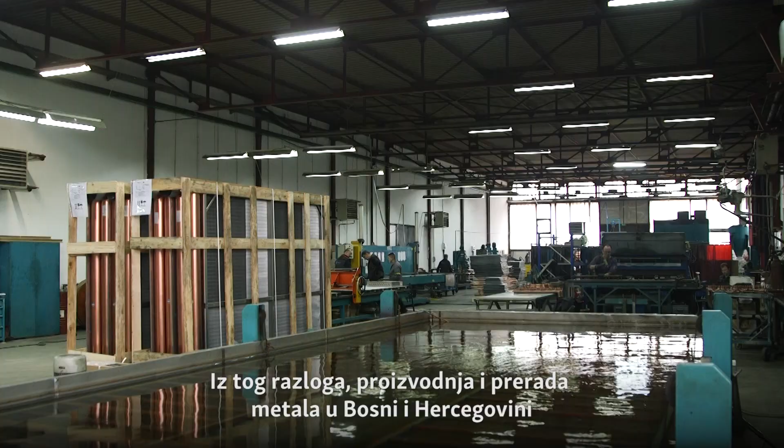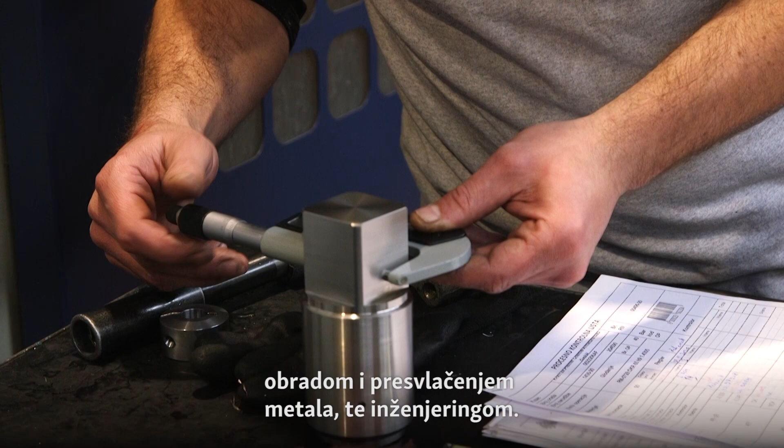Bosnia and Herzegovina is rich in iron ore, bauxite, lead, zinc and copper. For this reason, the production and processing of metals has a long tradition with deep-rooted history, especially in craftwork. Today, Bosnian companies produce base metals and final metal products through forging, metal processing, coating and engineering. Consistent growth in the number of companies and employees, a significant increase in sales and export revenues, and ultimately the profits, make the metal industry one of the most successful industries in this country.

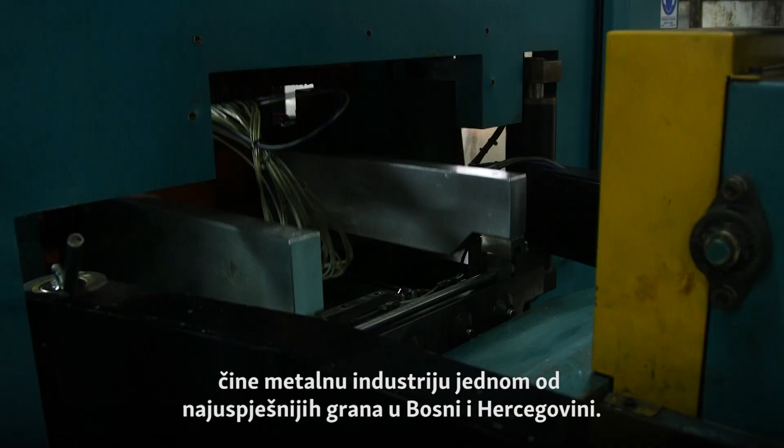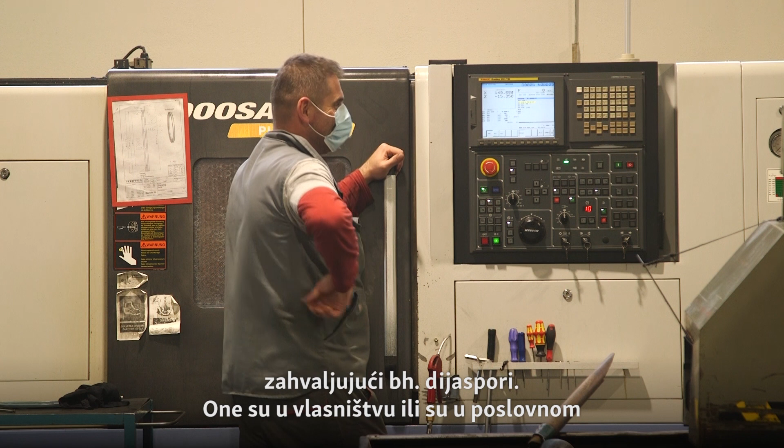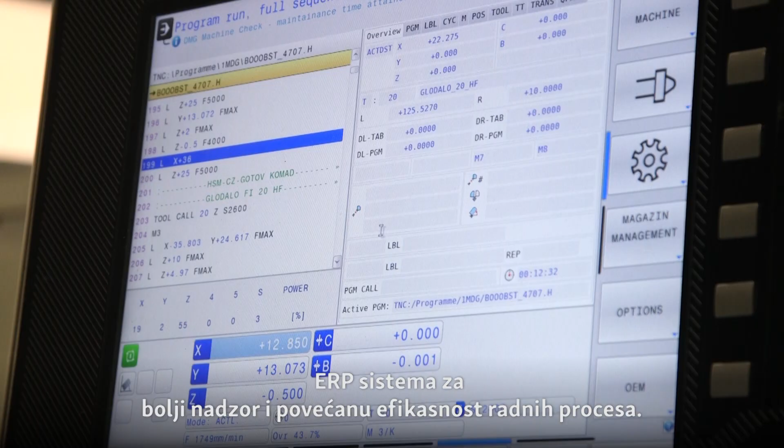In the last 4 years, USAID Diaspora Invest has supported companies launched by Bosnian diaspora. They are owned by, or in a business relationship with, diaspora entrepreneurs. These connections are made for better access to the international market, or for knowledge transfer from abroad to the homeland. A few years ago, the Obarshanin family's venture MDG International was one of our first success stories showcasing Bosnian investment potential. The USAID Diaspora Invest project supported them by introducing an ERP system for better monitoring and increased efficiency of work processes.

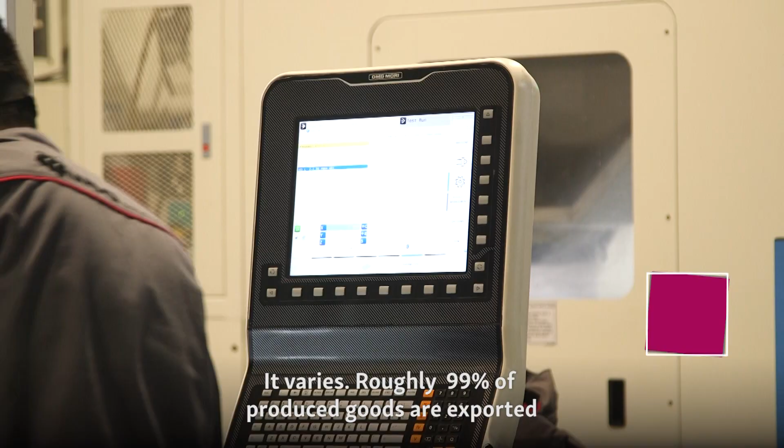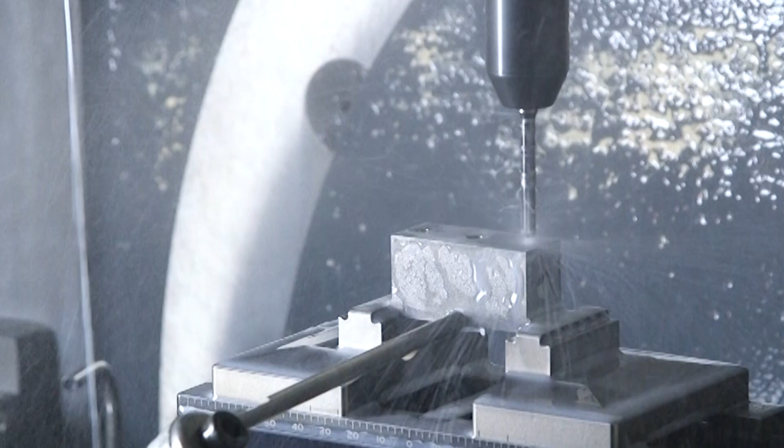Export-oriented MDG International supplies metal products for the transport industry, logistics, medical equipment, machinery, and to a lesser extent the automotive industry.

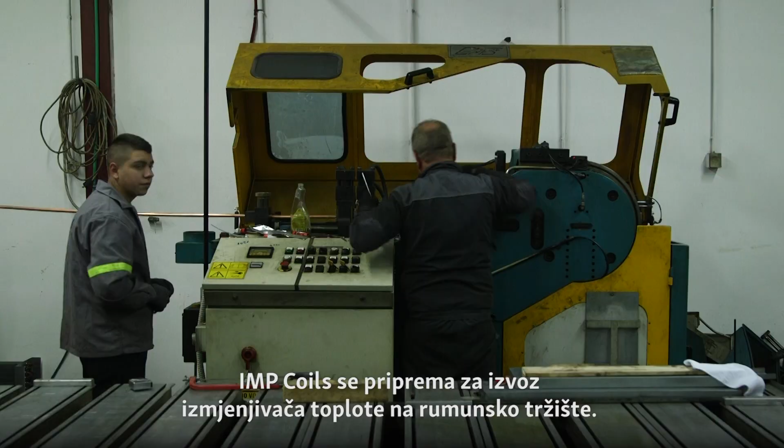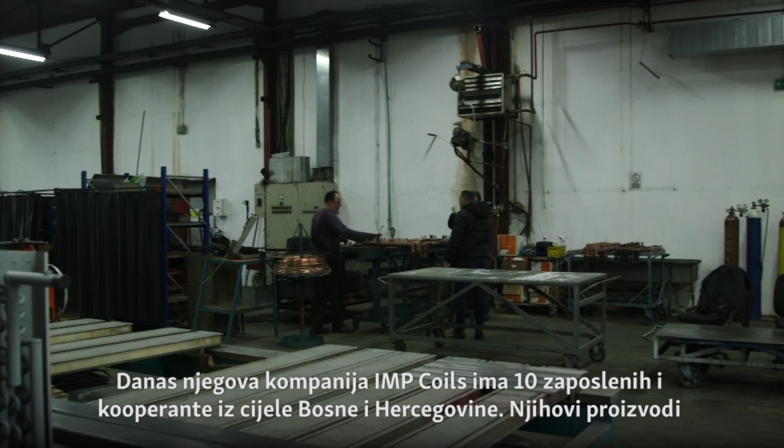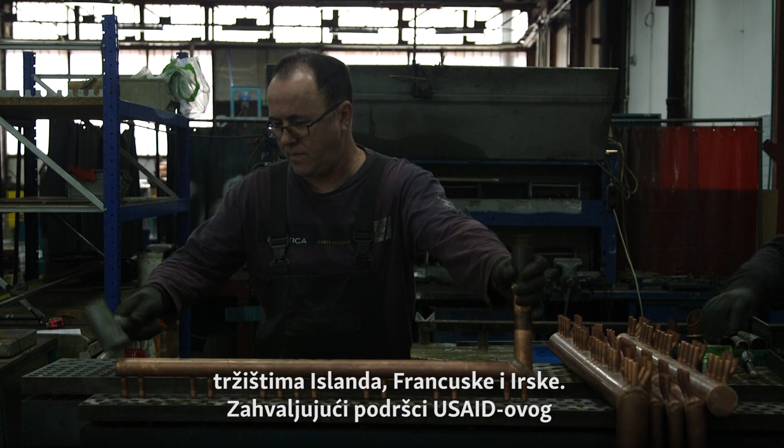IMP Coils is preparing to export heat exchangers to the Romanian market. The head of the company, mechanical engineer Asud Cekic, spent his previous working life in the production of air conditioning chambers and heat exchangers. After many years of work at the pre-war giant Uniklima, Cekic was given an opportunity to buy heat exchanger technology. Today, his company IMP Coils has 10 employees and subcontractors from all over Bosnia and Herzegovina. Their products have even reached Mexico and Qatar. Occasionally, they also supply the meat industry, agriculture, and dryers. New opportunities are opening up for them in the markets of Iceland, France, and Ireland. Thanks to the support of the USAID Diaspora Invest project, they purchased a software solution that facilitates their communication with clients.

We are now at Selpak, the business zone in the city of Prijedor. This is Sabahuddin Islamoski, who is behind the idea of launching a new business initiative in the metal sector. It all started from a craft shop which produced stainless steel elements.

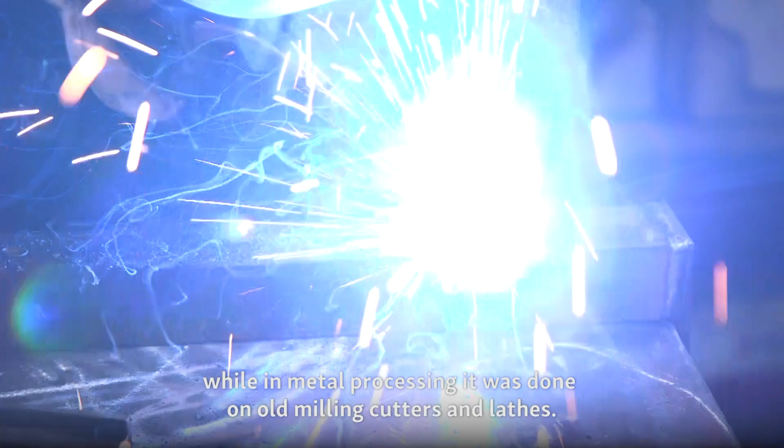After an increase in demand, the story of the company CNC Power began.

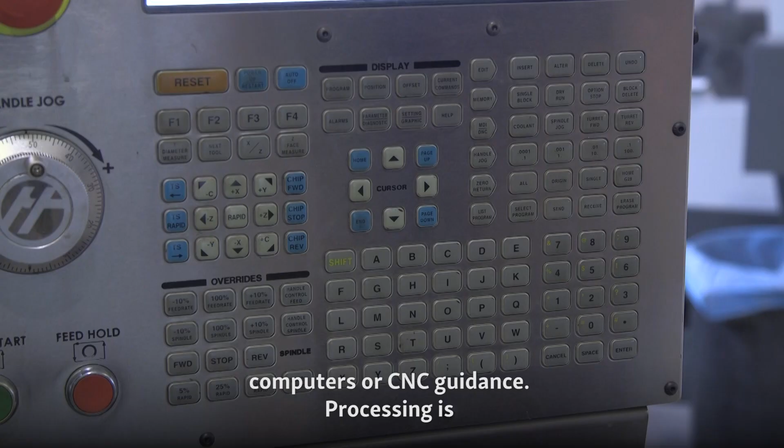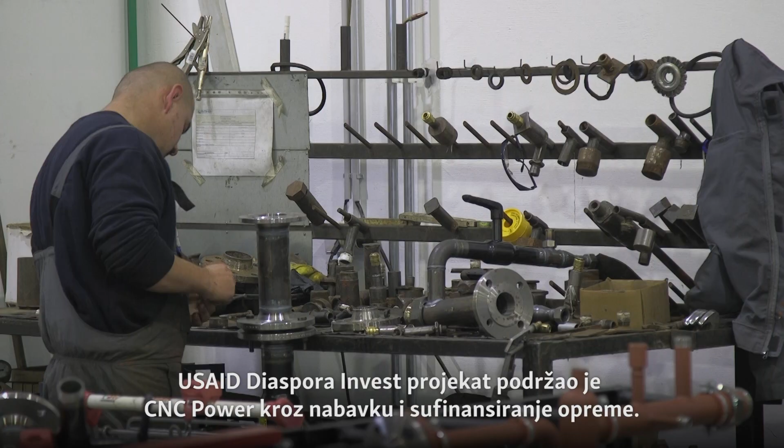The USAID Diaspora Invest project supported CNC Power through the procurement and co-financing of equipment. The company currently has 4 employees, and over the next 2 years, they plan to invest in new machines and hire 20 new employees. Where there is tradition, there is also a future.

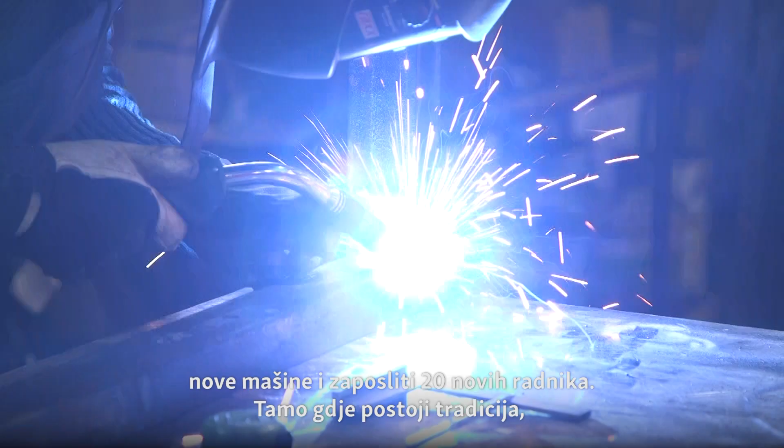But what else is necessary for greater success?

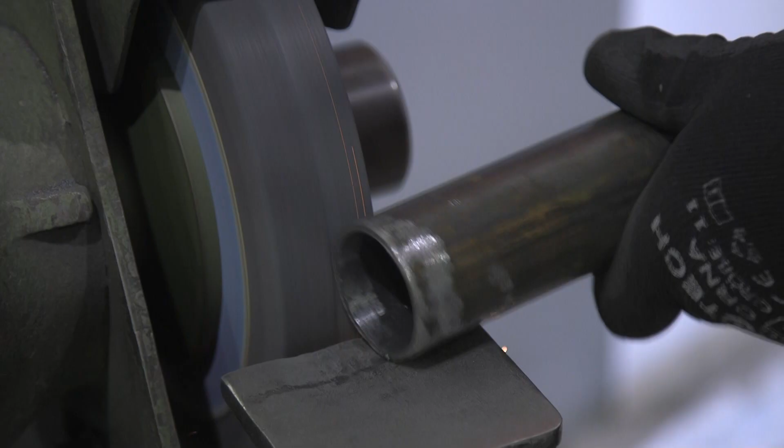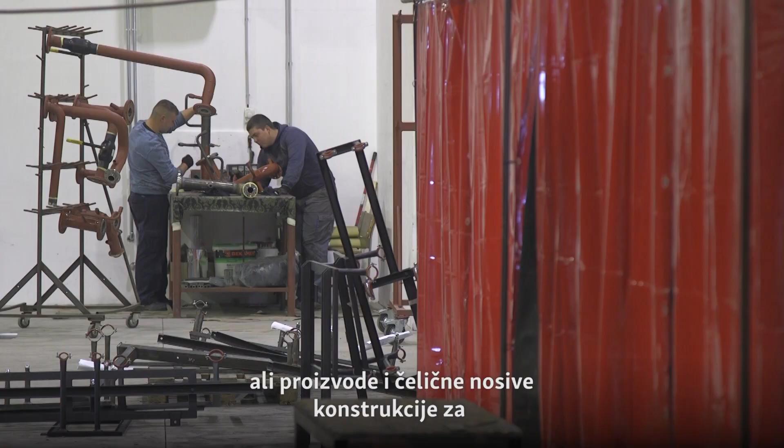Across from CNC Power, in the industrial zone in Prijedor, is where Edna Metalworking is located. The main product of this company is pump substations for central heating, but they also produce steel load-bearing structures for robotic painting, mainly in the automotive industry.

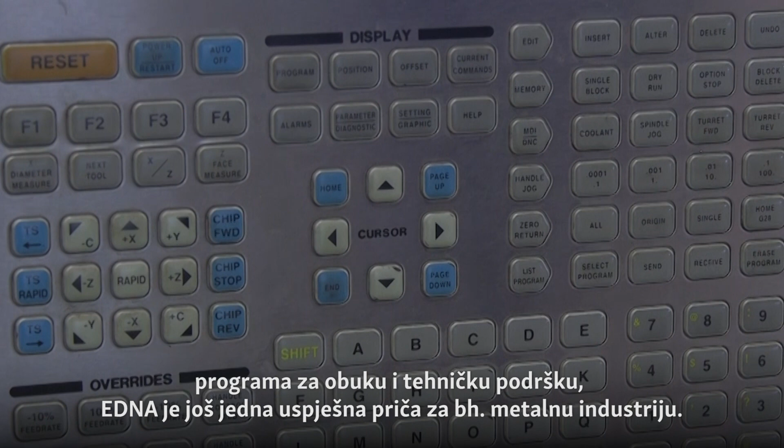Launched also thanks to a diaspora investment and a beneficiary of the USAID Diaspora Invest Training and Technical Support Program, Edna is another success story for the Bosnian metal industry.

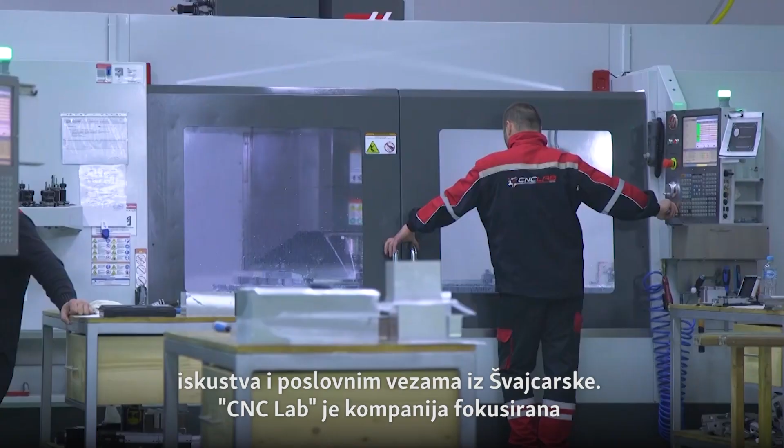CNC Lab is a company focused on metal machining, primarily for individual production, but also for small series and serial production on CNC machines.

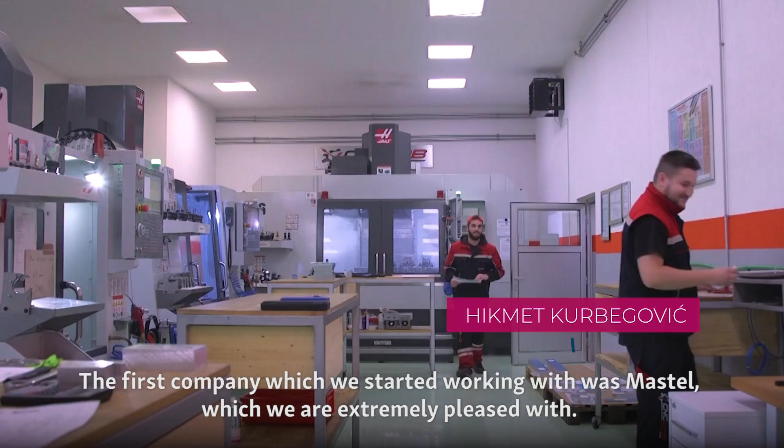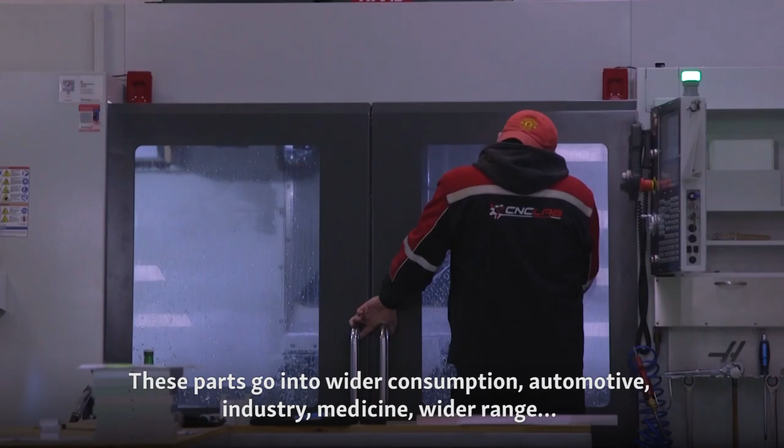But CNC Lab is not alone in Sanski Most. Several metal companies, in different stages of development, are growing and building their success stories in this city. One of them is the company CNC Tabakovic, which also produces metal products on CNC machines.

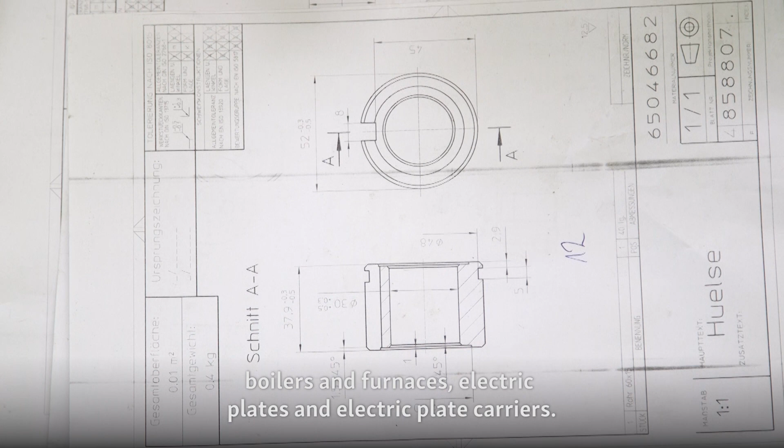Thanks to business savvy Bosnian diaspora in Germany, Austria and EU countries, most of the company's products end up in the Austrian and German markets.

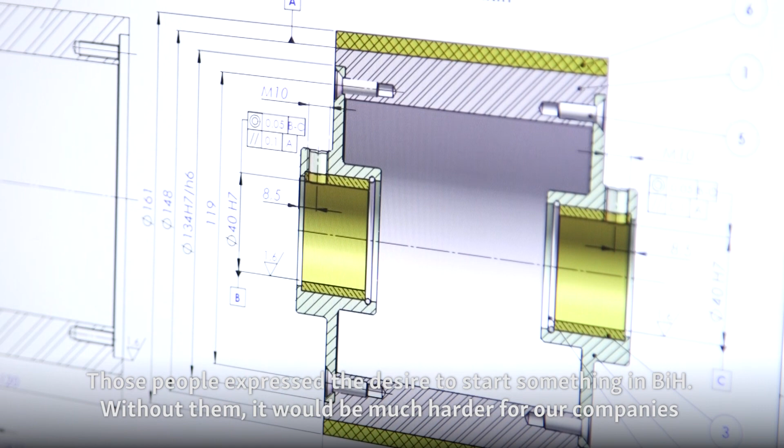They started production in 2019, when they had only one employee. And today they employ 4 people.

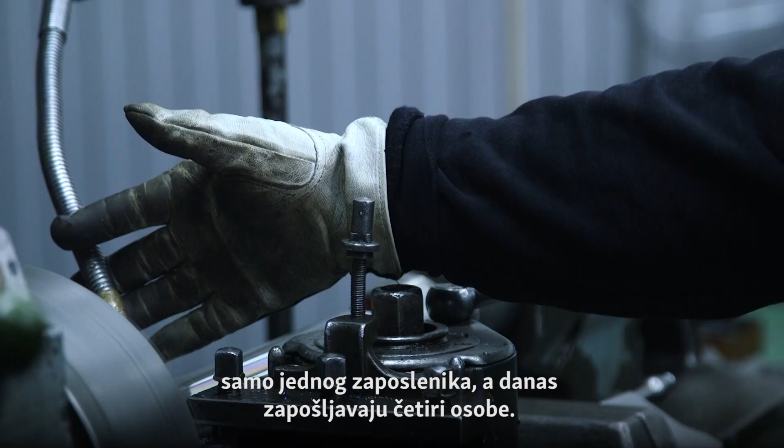Their staff took part in the sales and communication training provided by the Diaspora Invest project at the end of 2020.

As we move towards the border and the market of the European Union, there are more and more small companies that find their chance to connect with Bosnian diaspora in hopes of developing business in the metal sector.

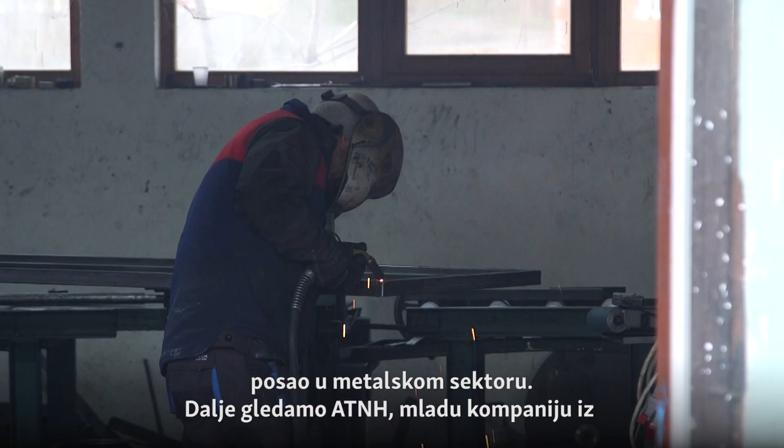Next, we look at ATNH, a young company from Bosanska Krupa founded in 2017. Initially, it was limited to hiring labor and making smaller products in just 20 square meters.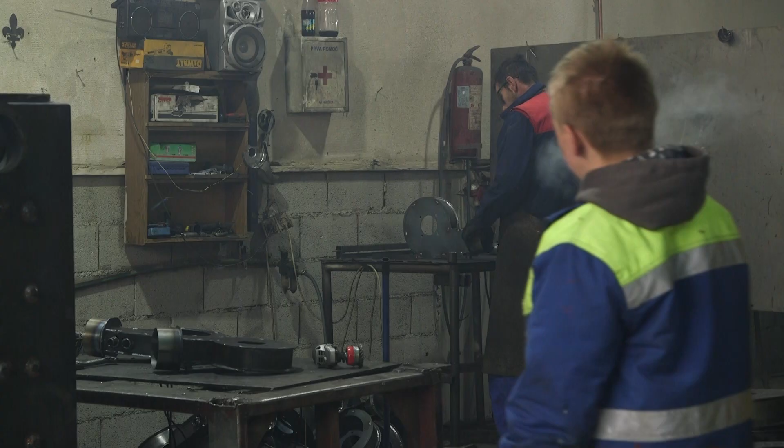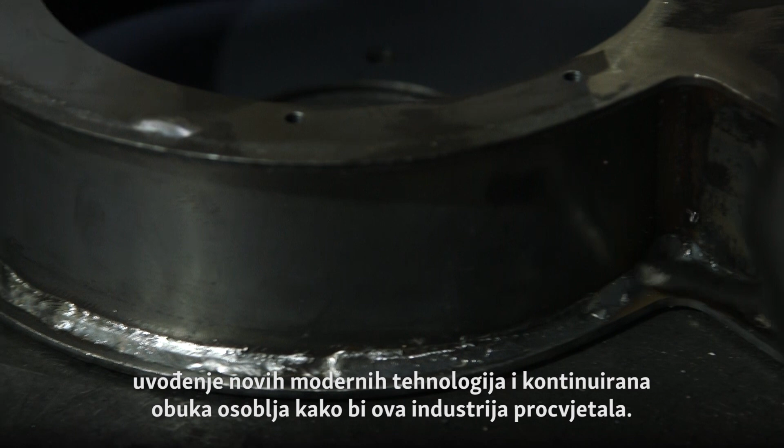Bosnia and Herzegovina's metal industry is growing day by day. These people show that there are great opportunities for this industry's development. Investments in small and medium enterprises, the introduction of new modern technologies, and continuous staff training are needed for this industry to flourish.

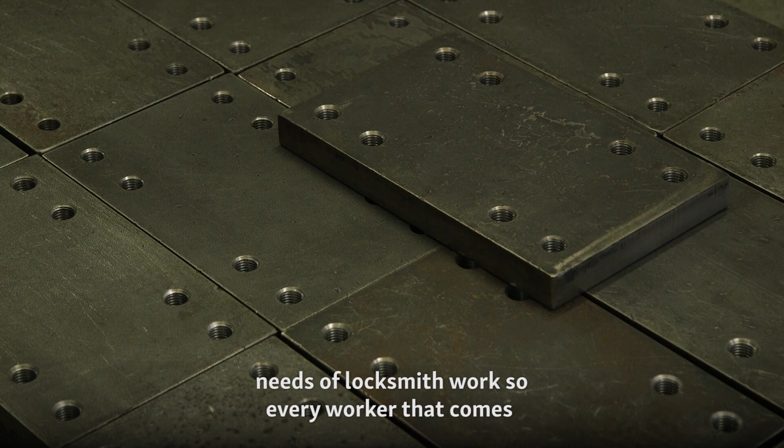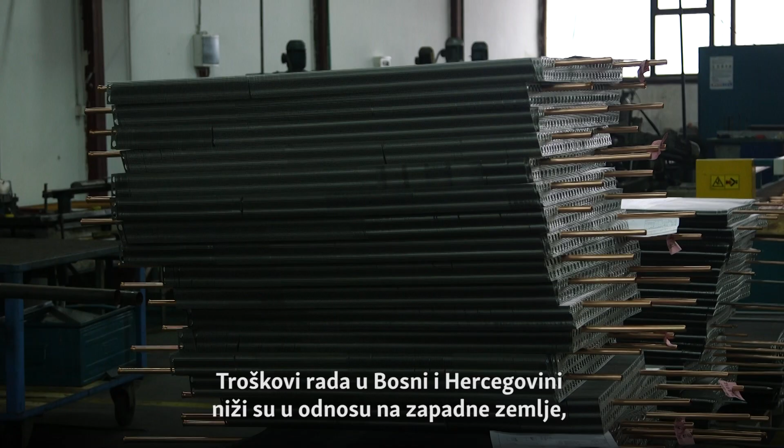Labor costs in Bosnia and Herzegovina are lower compared to those of Western countries. But this is not the only reason why Bosnian companies are chosen.

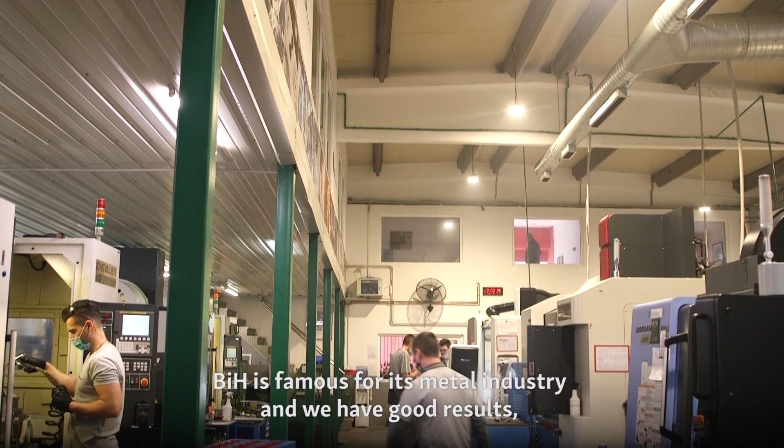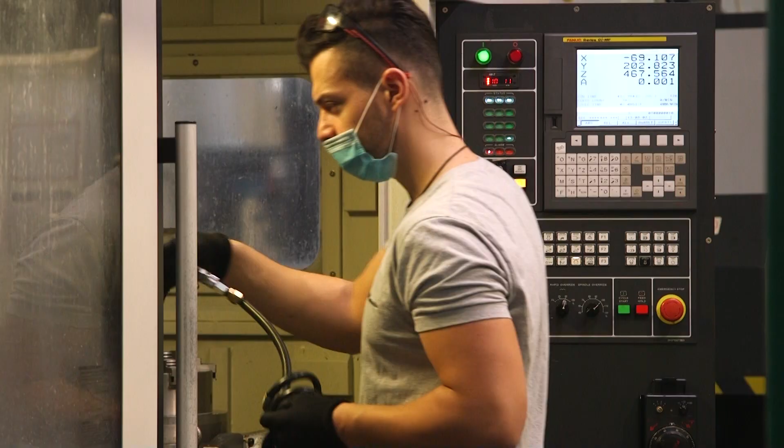Investors and clients from all over the world recognize the opportunities that come with the transfer of production to Bosnia and Herzegovina.

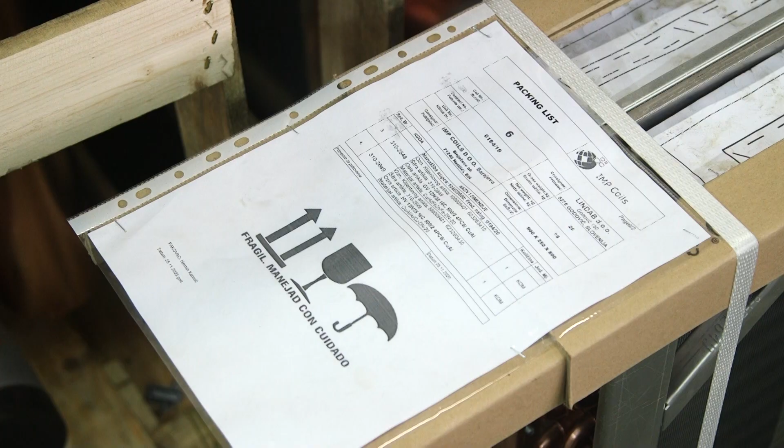With their successful work abroad, Bosnians and Herzegovinians have become the best ambassadors of their country's economy and key in attracting foreign investment to our country.

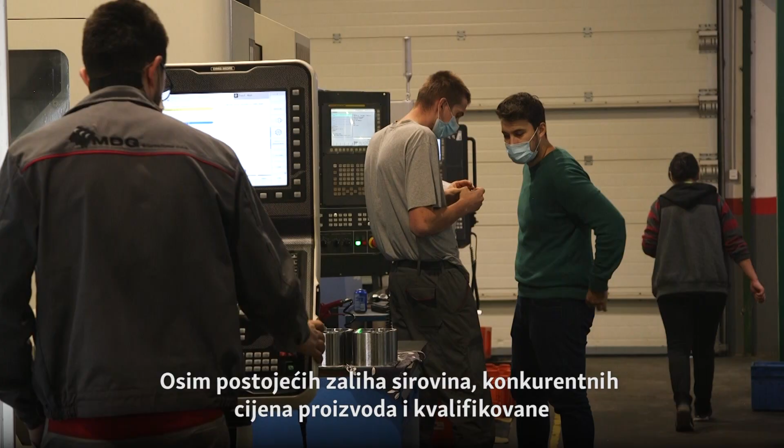In addition to existing raw material stocks, competitive product prices, and skilled labor in the metal industry, the Bosnian diaspora play an important role.